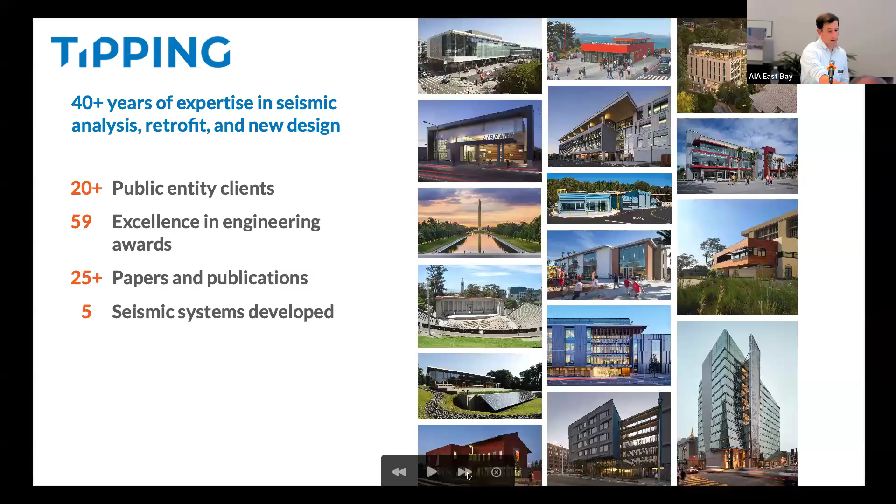That's a photo of our office, so please come by and visit us anytime you're here in downtown Berkeley. We're trying to blend rigorous thinking grounded in physics and engineering with a service mindset. I've talked about understanding our clients and collaboration, blending that with our technical experience to provide value on our projects. Who's the architect of your building?

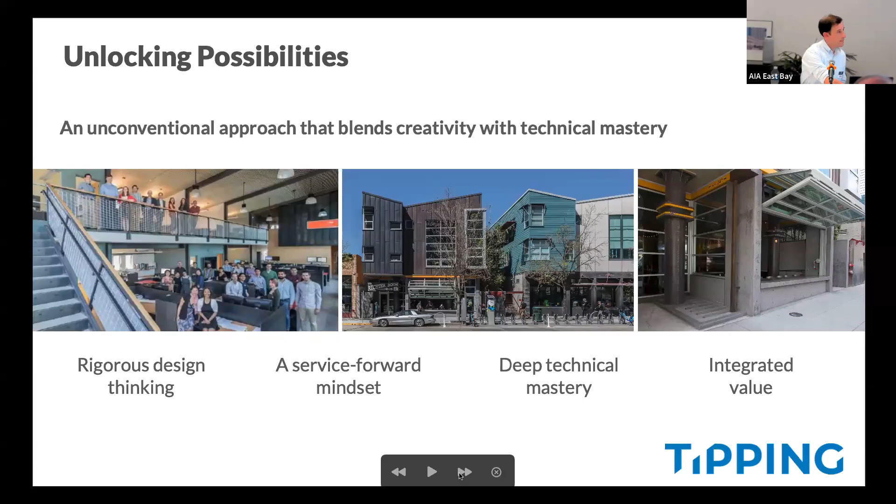Local architect Richard Fernau and Laura Hartman. Our firm was founded by Steve Tipping in 1983, started in his basement.

Steve's approach to engineering, which he's passed on to all of us, is trying to invert what some of the classic approach to engineering is. That's not to say all engineers are like this, but sometimes there's a tendency to think of engineers as wanting to go away and come up with the answer and hand it to you. That's really not the ethos that we're brought up in.

While you might think of engineers as accepting givens, performing calculations and creating details and drawings based on that, we're really trying to invert the process and understand project goals, integrate the structural design with the architecture, push forward the design before getting deep into the calculations. Of course we have to have an understanding of where we think it's going to go, but not getting lost in calculations, because that's not really what's valuable to our clients. So creating details and providing verifying calculations at the end.

We're trying to solve the project's problems, not our own problems. We're not trying to make it easy as engineers, and we're trying to take a whole project perspective to have an integrated design. Really what this requires sometimes is taking risks and being uncomfortable.

Sometimes we have to do things differently than we've done. We don't have the last job that's exactly like this one. We have to ask our clients to trust us that we're going to get there, even if we're 80% sure that we're going to get there. We're not sure how we're going to get there, but we know we're going to get there in the end. So it does require a little bit of uncomfortability and risk taking.

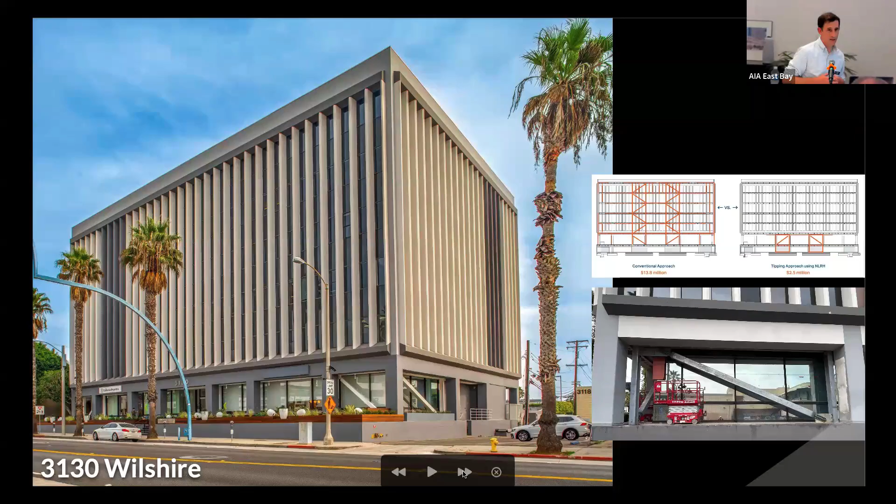The previous engineer scheme was a pretty traditional scheme that was going to cost $14 million. We used performance-based design thinking and deep understanding of the existing structure to basically harvest the strength of what was there and meet the requirements of the seismic retrofit for $3 million instead of 14. So this is about understanding existing buildings and what strength they have and what their behavior is going to be, so we're not over designing in the case that there's only a certain requirement for a seismic retrofit.

So that's a bit about tipping. I'll pass it on to Winston. Sure, go for it. The Philadelphia architect in the California ones. Yes.

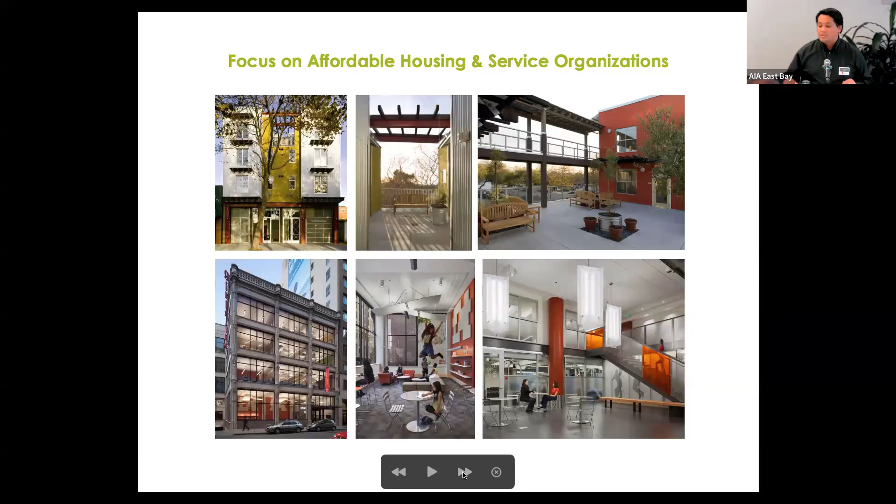As I mentioned, our work for nonprofits focuses on two kinds of mission-driven organizations: ones that provide housing to the community, and others that provide more of the community services side. So I brought a couple examples of each of those types.

First, starting with an older project, this is Girls Inc. of Alameda County, downtown Oakland. We took a building that was originally constructed in 1919 - that's the middle image - as the headquarters for the East Bay Water Company. So this is where back in the day you would go pay your water bill.

It had gone through a series of renovations over the decades. Our clients found it in 2010 and found that many of those previous renovations were not very sympathetic to the original building. The building also required seismic retrofit for the change of use.

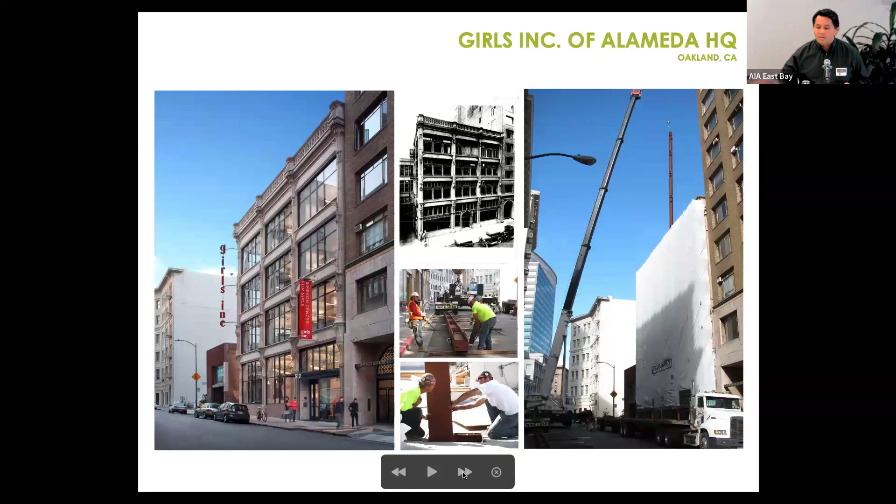That retrofit included a steel brace frame in the rear of the building and a concrete shotcrete wall in the front of the building. These are just a few of the images of the finished spaces where you can see some of those elements really highlighted and integrated into the finished spaces.

Jumping ahead to a more current project, we recently completed RYSE Commons in Richmond. This was a project where we renovated an existing building, added a new 12,000 square foot pre-engineered metal building, and created a little campus for this youth organization.

The construction had just started when March 2020 occurred, so these images are both a snapshot of that moment, as well as showing the two systems in that new building. There's the pre-engineered metal building, and then we learned along the way that we couldn't directly integrate an elevator like we had planned with that system. So we actually have a building within the building to house the elevator.

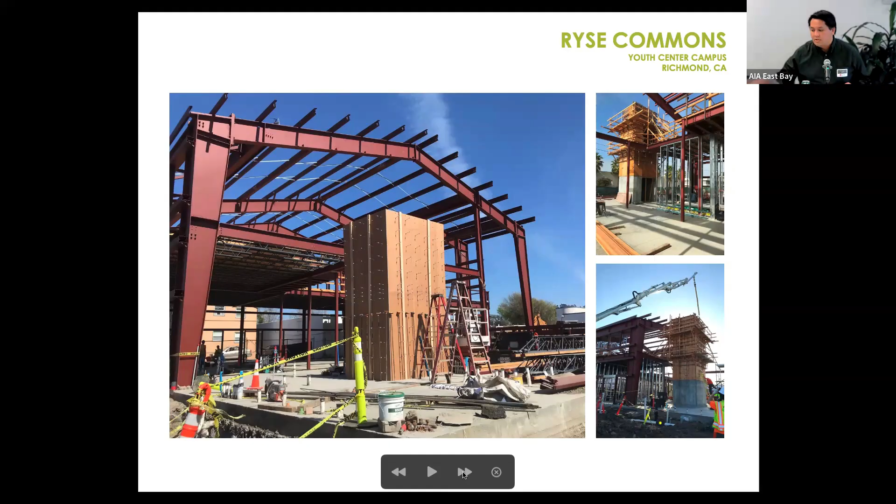Moving over to our affordable housing side, again starting with an older project, Jefferson Oaks, downtown Oakland. We took two historic - older, not necessarily historic, but older - hotels, and we renovated both of them, joined them at the lobby level to create a single affordable housing facility.

One of the challenges of this project was that we had to maintain some of the businesses in continuous operation, the ground floor businesses, throughout the whole project. So the corner space actually never closed, and then the spaces up the street towards the state building only had a minimal downtime. That meant any new seismic elements we brought into the building could only occur in certain spots in the building.

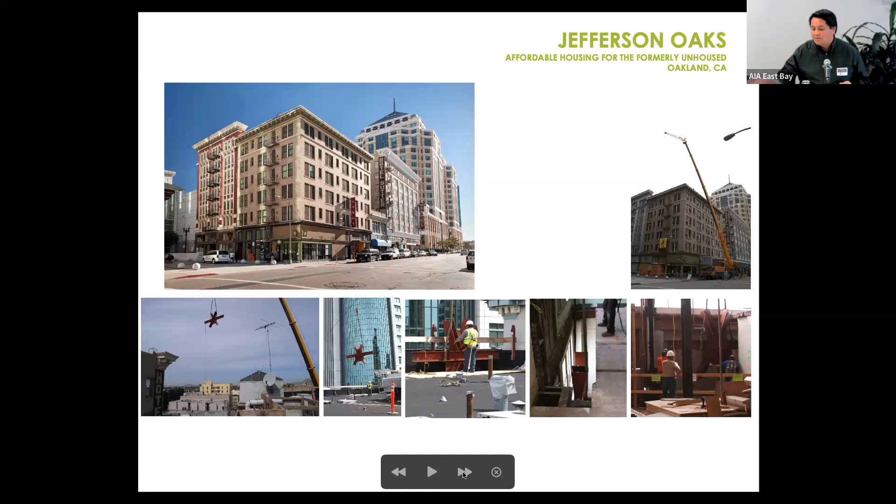And of course, that meant we had new brace frames going right through our lobby, right through our main entrance. But we figured it out. These are some images showing the steel pick and that steel getting slotted into the building, and in the next slide, images of the finished spaces with those elements in place.

And then I'll end here on a more recent housing renovation. This is our Beth Asher project for Saha in the Diamond District of Oakland. This is actually the sixth and latest building of a series of buildings we renovated for Saha, Satellite Affordable Housing Associates.

They're all 1960s concrete frame, senior housing, affordable housing buildings. They all had seismic deficiencies. This is pre-ADA, so they all had accessibility issues. They all suffered from horrible entrances and community spaces that were afterthoughts. This is the era of building a lot of housing, but not necessarily always the highest quality housing.

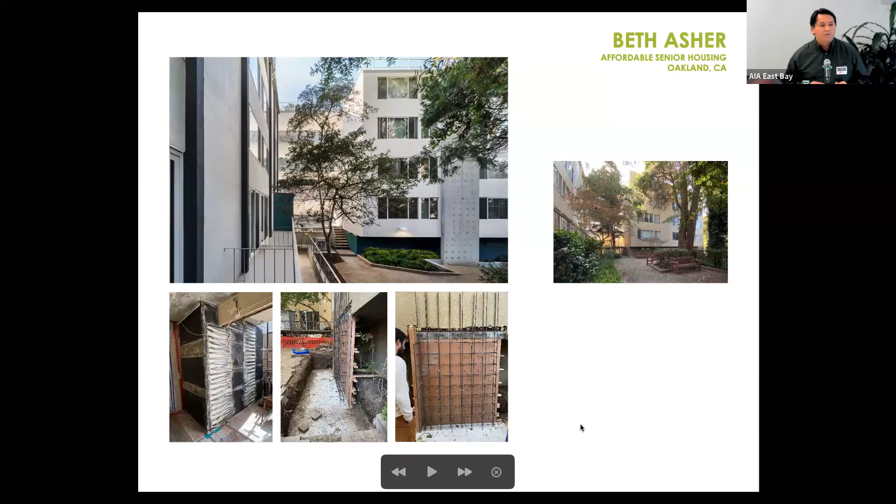That is my last slide. That's cheap.

Anyone have any questions about either one of those presentations? The question was who the structural engineer was for that project—that one was IDA Structural Engineers in Oakland.

Okay, so this presentation usually takes about 45 minutes, but I'm going to do some speed reading and cut down on the overall scope.

The basic idea here is we do a lot of prefabricated work, and it's a fascination for me as an architect. It's sort of the old dog learning a new trick, but also from a structural standpoint, it presents a lot of very interesting and innovative challenges. This is also part of the theme of innovation in construction technologies.

So without further ado, of course we all know this stuff never takes place in a vacuum. There's always a team of people involved. This is our team over at Lowney. We have offices in Los Angeles in the beautiful Bradbury building, in downtown Honolulu in Chinatown, and also in downtown Oakland, where the firm was founded about 23 years ago.

What we do covers a broad band. Our primary practice right now is between residential and hospitality, about 60% of our work. But we also do adaptive reuse, probably not to the same scale as Winston. We do master planning, but we kind of grew up doing grocery stores—for instance, we did the Whole Foods at Lake Merritt, and that actually was an inroad towards the prefabrication world.

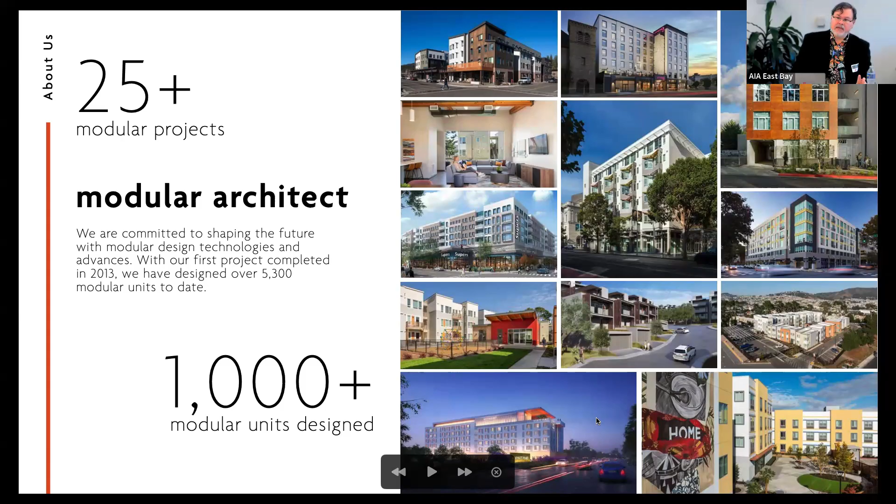So what we have done recently, and this is really focused on our multifamily work, is to start off with the premise that every single project, whether requested or not, is modular. I'll explain why that's important in a moment.

What kinds of buildings can you do using prefabrication? We can do any building using prefabrication. I think we've seen some great examples lately—for instance, OWOW has that high-rise tower in downtown Oakland. That's prefabricated of a different type, all mass plywood, cross-laminated. But we are primarily focused on volumetric, which means you build it in a factory and ship it out to the site. That has huge advantages.

We're doing a medical office building right now. We are doing 5 projects that are residential multifamily, all volumetric modular.

And this is why. Cost is just a huge impediment right now for any development. What this allows you to do is save on time, and time is money.

And the way that works is normally what you have to do is build the foundation, build the podium, whatever is required to set the stage. And then the carpenters come in and frame it up. And then the finishers come in and fill it out.

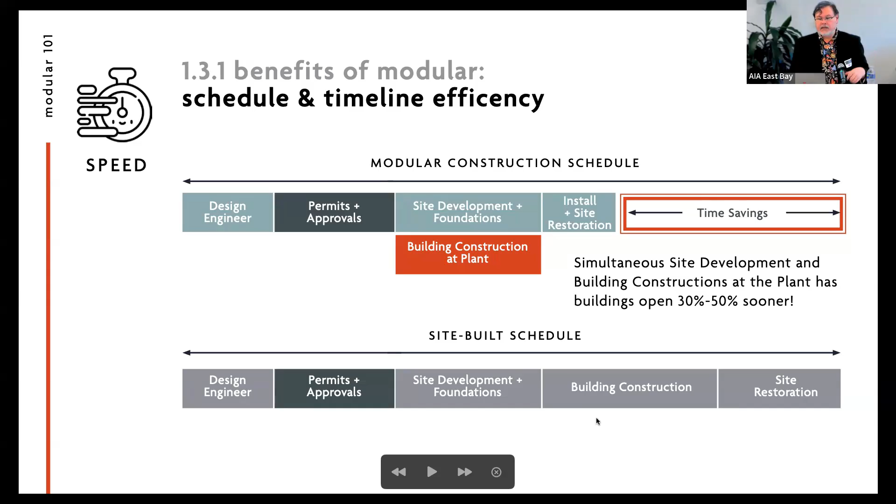What prefabrication allows you to do is while the site work is being done - foundations, plumbing, utility connections - there's a factory somewhere that's actually building the superstructure. You'll see some examples of it in a moment.

But as you can imagine, if you're doing those as parallel track processes, you're going to save a lot of time. It's actually pretty remarkable to see a building appear out of nowhere in the space of a month, which is how most of these go down.

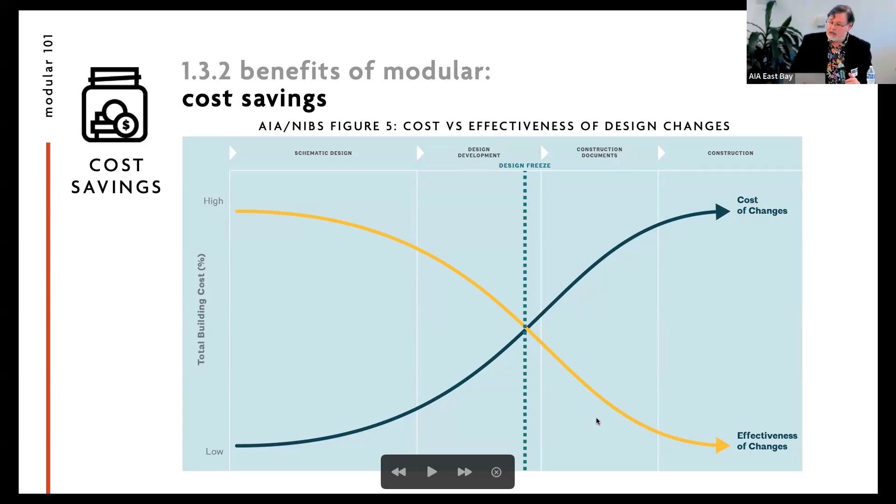It does require that you have some discipline about making decisions. And that is why it's so important to have the team on board early on, because there's 2 stages to this. I'll talk about that in a minute - there's not only the integrity of the box itself, but then there's the usual concerns of shear and seismic lateral.

That come into play. There are several different types of prefabrication. We've done the panelized systems, and we've done volumetric.

Shipping containers was kind of a flash in the pan until people realized that you cannot live in a space that's 7 foot 6 inches across.

We have done projects here in Berkeley that use shipping container technology, but that are actually built custom. So it's a strange hybrid. This is back when you could still get things from China without a 25% tariff on them.

And then 3D printing technology, generally, we don't do that. We are starting to entertain it, but it's really geared towards single or two-story, and that's a very small percentage of our practice. So here we go.

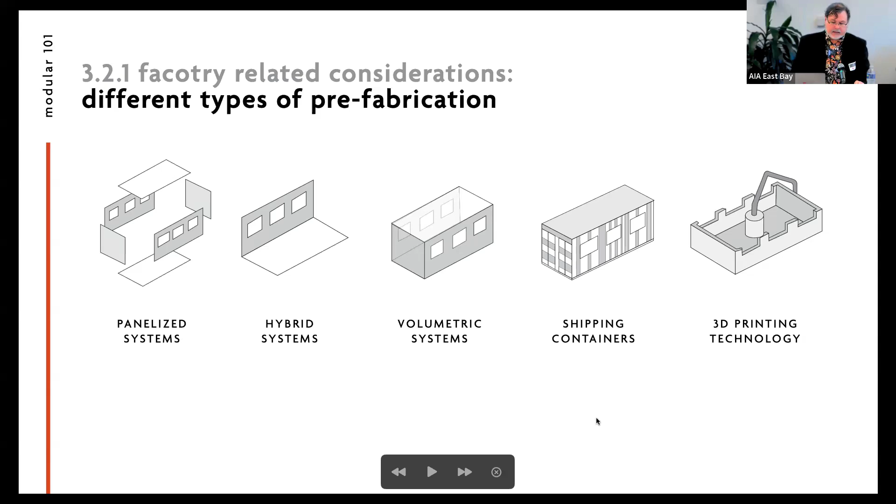There's two types here that we work with commonly. You've got wood, both type 5 and type 3 - for those unfamiliar, that's just the code designations for fire resistance. And then steel, which is in some cases type 1, sometimes type 2. We've done both of those.

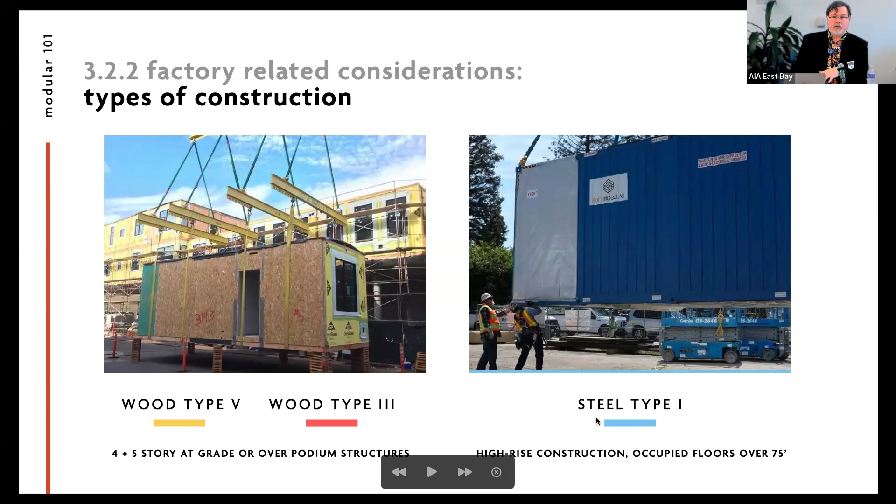And this really gives a preview to what's in store. One of the things it does is it imposes a certain rigor on the planning of the units.

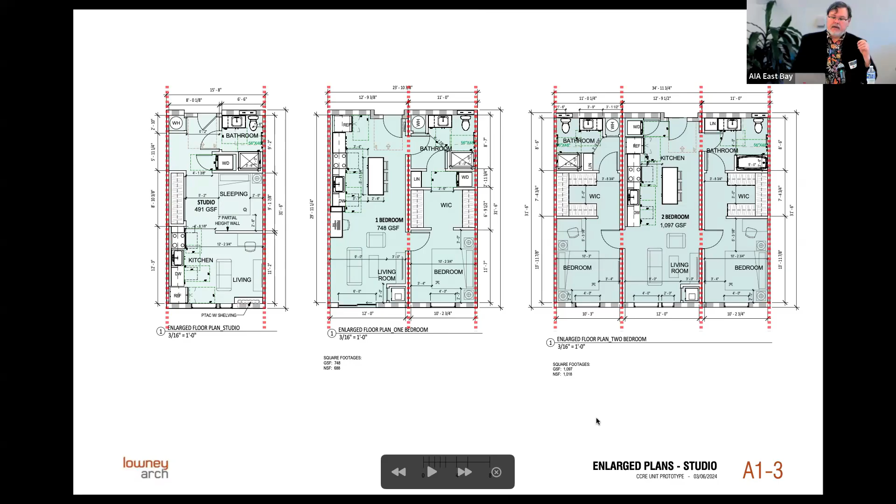We do the exterior of the building on the site. But ideally what you're doing is you have rooms across the hall from one another, and the corridor - that entire segment, that slice of the pie - is built in the factory.

And so if you can pull that off, you're looking at this plan and you're probably going, well, that is just a dumb rectangular box. However, it is possible to dress them up in a way that you don't recognize.

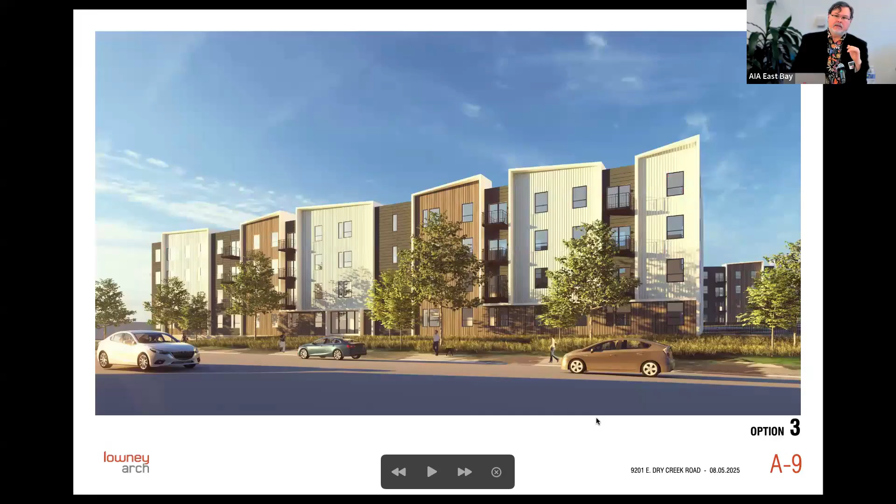The floor plan that you just saw is exactly this building. And so it is possible to get away with that, just in case you're interested.

So this image is a project in El Cerrito. This is Mayfair near the BART station, El Cerrito del Norte. And I think this really illustrates several of the principles.

One is you have a box that you're lifting 90 feet in the air. That thing has got to be self-supporting from day one. It has 6 sides - there's a floor, there's a ceiling, there's 4 walls.

It has to be stiff enough to be picked up without wrecking all of the interior finishes, without everything capsizing, because this thing is shipping with the appliances, cabinets, the finishes, the drywall - everything is already in the box. And that is the key to the speed of it.

However, when you pick up a 20 to 40,000 pound object, there is the opportunity for it to flex. This picking system is really great because it has 8 points, but we have had that experience where it does flex and you do have to do a little bit of patching.

Totally essential to have an engineer that understands that. Now, we typically have an engineer that does both the modular portion of it and the site portion. It's natural, but we have separated them before, where you have somebody who's doing the box and then somebody who does the overall building.

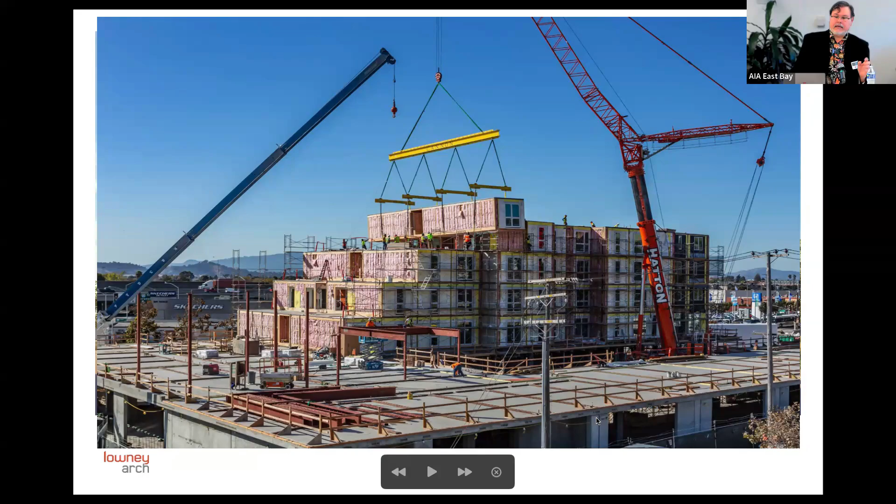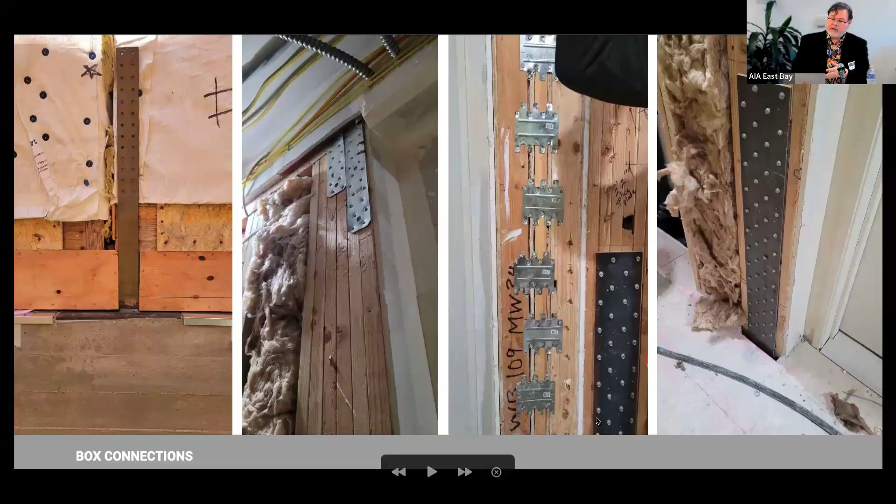And then the other aspect here, this is where the innards of the building are exposed. The left-hand image is the connection to the foundation. First, you really just have a loose stack of boxes sitting out there in the field. You've got to connect them together, and we rely on our structural engineers to nail that down. So we have strap connections between boxes and between floors, taking all the loading during a seismic event to keep everything glued together. It's light gauge metal plus sometimes a more robust bolted connection.

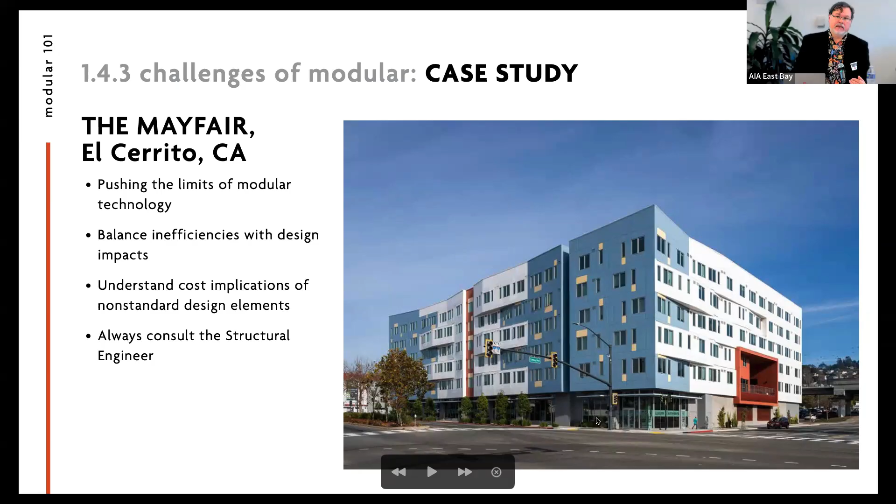This is a typical section. Every box has a ceiling, every box has a floor. This building has 30% more wood in it than a standard stick frame. That's both a good thing and a bad thing. The good part is that's all entrained carbon. It's just that we don't really know what happens at the end of life cycle with that carbon - it's like every other stick frame building, but we're working on it. The ultimate goal would be to reuse these boxes in the future, but we'll get there.

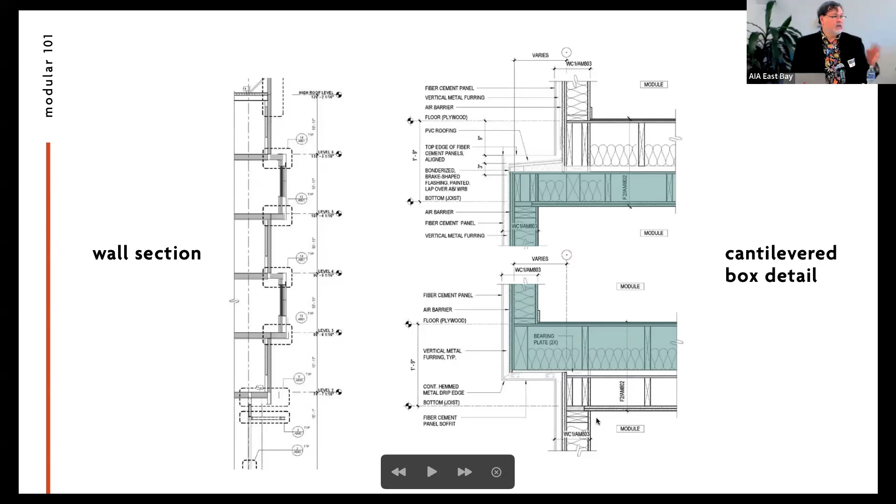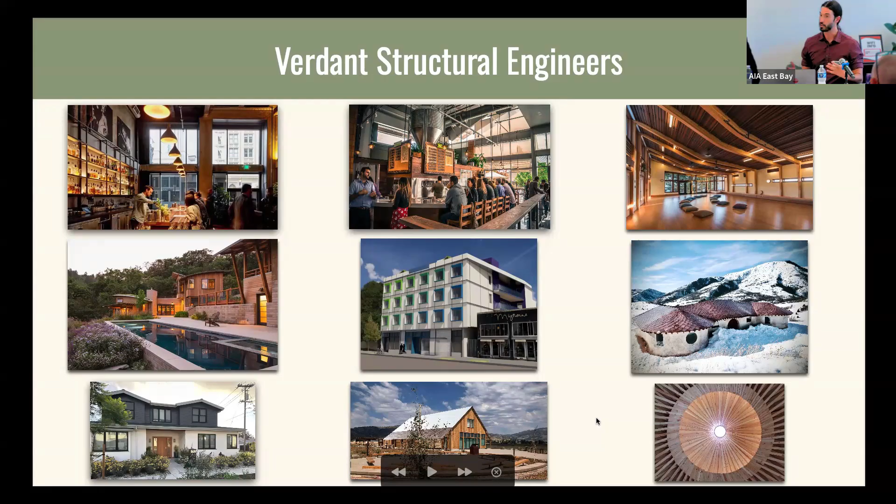But we found ourselves specializing in this category of what we call deep green or low carbon, natural, biogenic building systems. This includes straw, clay, hemp, and of course low carbon concrete and mass timbers. I'll talk more about these projects - first, a monolithic Adobe building in Berkeley on the bottom right, and a light straw clay building with sapling cross bracing in Michigan. You think you've heard everything, and sometimes people bring something new.

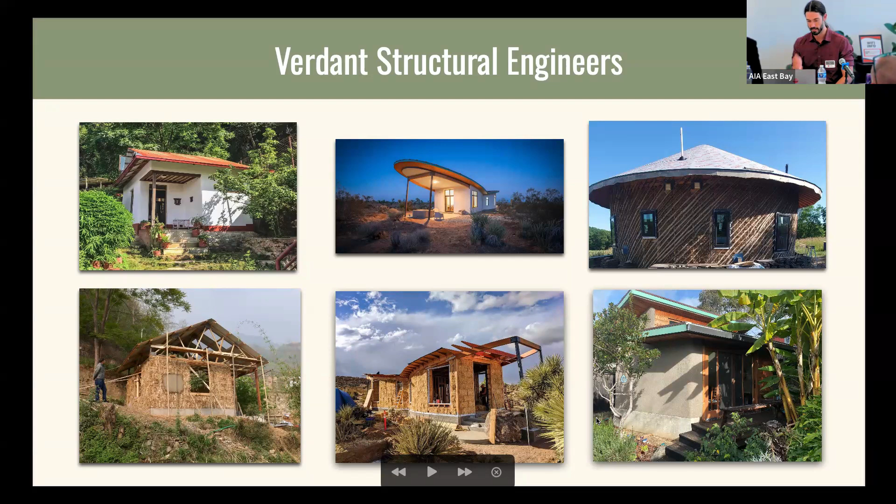There's a straw building, very fun design down in Joshua Tree, and some bamboo work abroad. That was in Nepal, earthquake retrofitting.

But we found the value of having a company of our size as a strategy - you can't specialize in alternative materials without being experts in conventional options. When you're trying to be the best service provider you can be to your architecture clients, your clients abroad, you want to be knowledgeable on all materials that might be applicable to their projects, especially ones they might not know about.

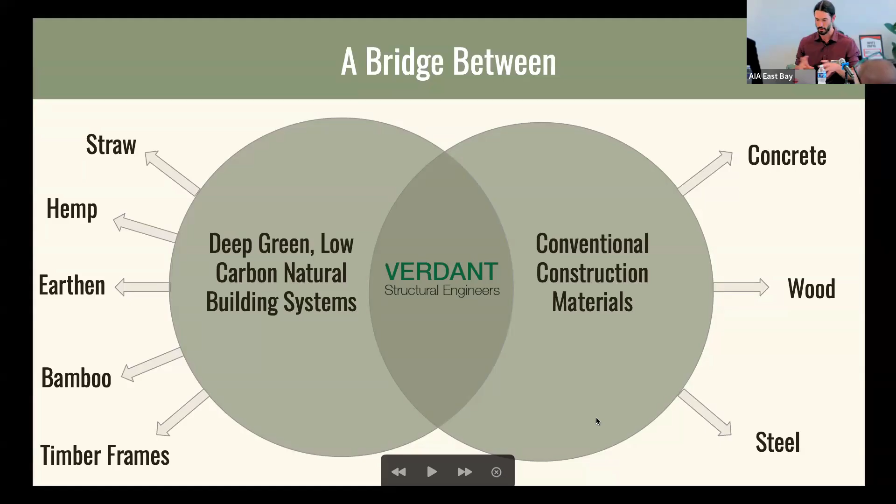We have one of the first operations in the country at the scale we operate in, where 15 to 20 people are rapidly learning from our conventional projects and applying those lessons to our alternative projects. We're learning from a hemp project technique and applying that to straw clients. We're also learning from the quantity of fines in Adobe or rammed earth mixes and applying that to alternative concrete approaches. This rapid turnaround is very valuable and an exciting space to learn.

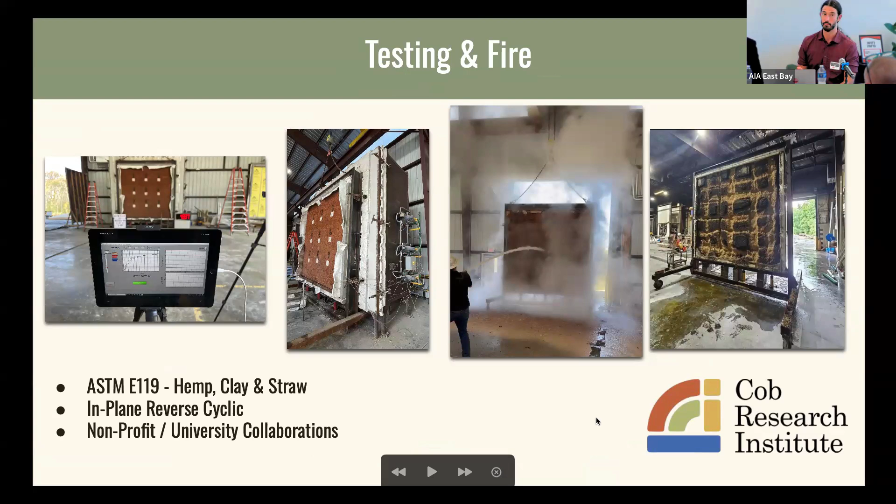Our primary work is helping people acquire permits with the structural calculations and documentation needed. For these alternative materials, we've found ourselves getting involved in a lot of research, including fire tests. A lot of these materials perform quite well in fire. I'm also vice president of the Cob Research Institute, cob being a monolithic Adobe type construction.

It's nice to pause and identify that these natural building systems, a term I don't love since it can be a little alienating, generally fall into three categories. Many are just like wood framing systems, most of your straw, hemp, and light straw clay, which is mostly straw with a little clay, are just insulation systems. About 95 to 99% of the way people build with them, they wrap them around classic wood framing structures, and we have to manipulate how we deal with those wood structures to accommodate the needs of these systems.

Then there are ones similar to wood or concrete and CMU, like adobe, compressed earth block, rammed earth, and cob. These are all different themes on the same subject, mostly clay-based, whether made in a block, poured or formed monolithically, or compressed. Then there's one unique case, full bale load-bearing straw, which uses a reinforced plaster system to resist earthquake forces.

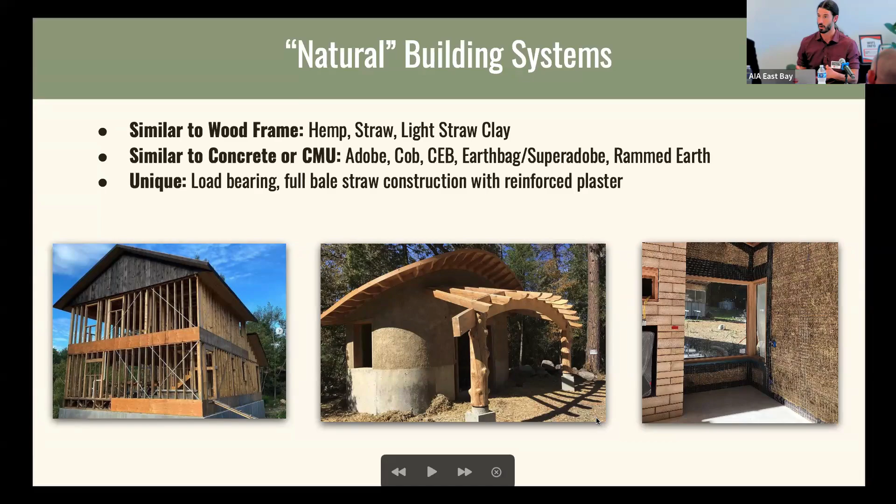With the permit acquisition work and research, we realized we could approach the International Code Council, and also ASTM at times, to try to affect code development in this realm. I'm happy to say I've played a role in a lot of these now-codified systems in the International Code Council, and I was the lead engineer on a few of them. Most are in the appendix of the International Residential Code, the prescriptive code.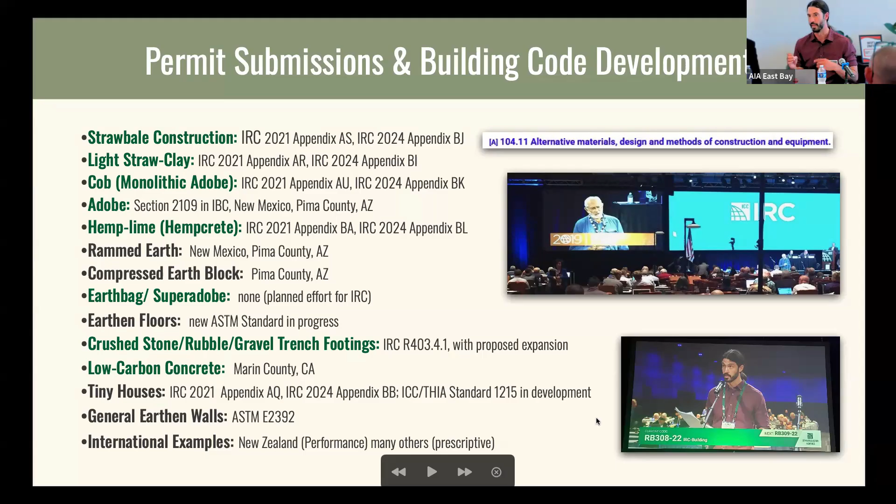It's a small first footstep in the door for these materials, and there's a long way to go. Only a few are mandated for statewide use in California, but all are contained in the code for at least voluntary use by jurisdictions. I like to note that a lot of our work technically, if not officially, falls under CBC 104.11, the alternative materials section of the code. That scares people off sometimes, but really knowing what's truly alternative about your project can make it easier than it seems, depending on how alternative you are.

With our work in code development, research, and permit acquisition, we've become attractive to product manufacturers trying to innovate in this space. This is where I feel we're really having the most effect on our conventional architectural clients. Some of those building systems I mentioned are naturally 1 to 2 foot thick walls, sourcing materials from a straw farmer or hemp farmer as byproduct. These products are changing that narrative, since you're buying from an official product manufacturer, but they're alternative to the building code in all kinds of ways, some in every single way, like our mycelium product manufacturers that we've engaged with.

Some of the building science knowledge we've gained has gone into publications with New Society Publishers, including a book on cob or monolithic adobe that came out last year to assist anybody trying to get a permit and design with building science in mind. The California Straw Building Association also has an excellent resource and detailed book that we all contributed to as well.

I'm going to end with talking about my second company, which came out of an EPA grant, again the Small Business Innovation Research, SBIR, Small Business Innovation Research Grant that the federal government offers.

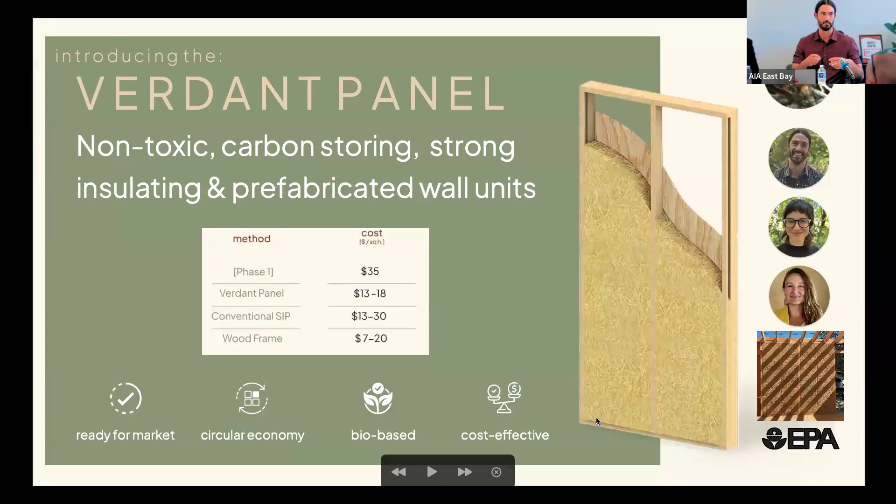These are rapidly renewable, existing agricultural byproducts too. So these aren't forests that could still be growing on their own, deepening their relationships and this and that.